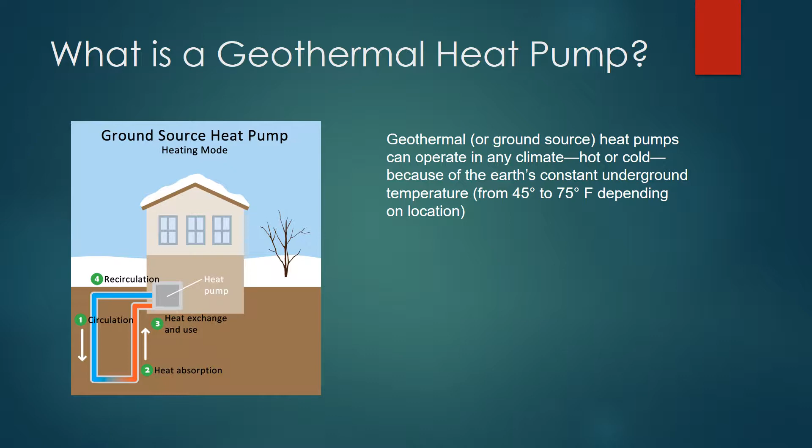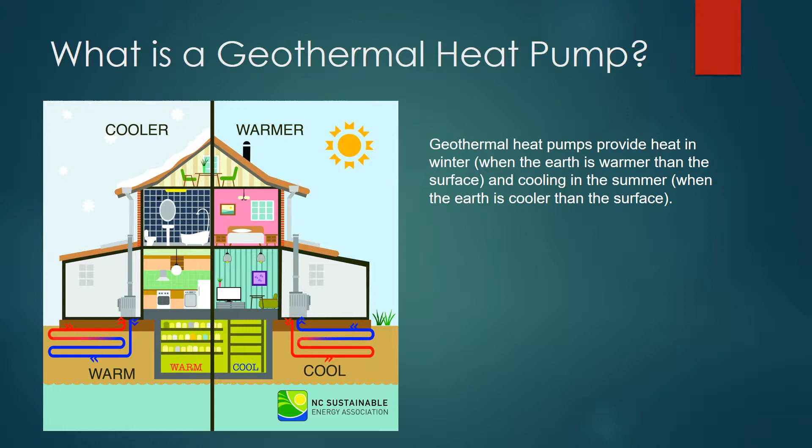Heat pumps exist all over the United States in all 50 states, and they are not limited by geography, weather, or climate. Geothermal heat pumps are generally deployed on a distributed basis. And by that I mean residential or commercial property owners install these heating systems in their own buildings.

Although there are certainly positive externalities and environmental effects, the benefits of lower energy bills, resiliency, and safety, as well as the costs of installation and maintenance, accrue largely to the individual building owners.

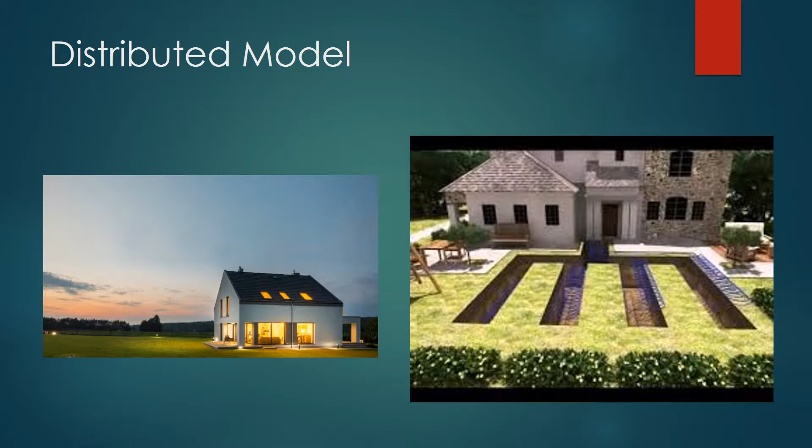Now, there have been some experiments in deploying these systems on a decentralized community-wide level. The best example of this is at Ball State University, which currently has the largest geothermal heat pump system in the United States. And when you deploy this technology at a larger scale, you can achieve advantages in aggregated loads, economies of scale, and increased efficiency of equipment.

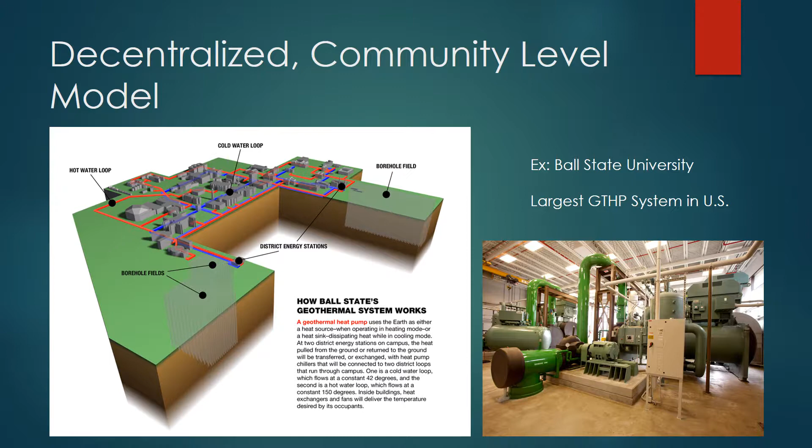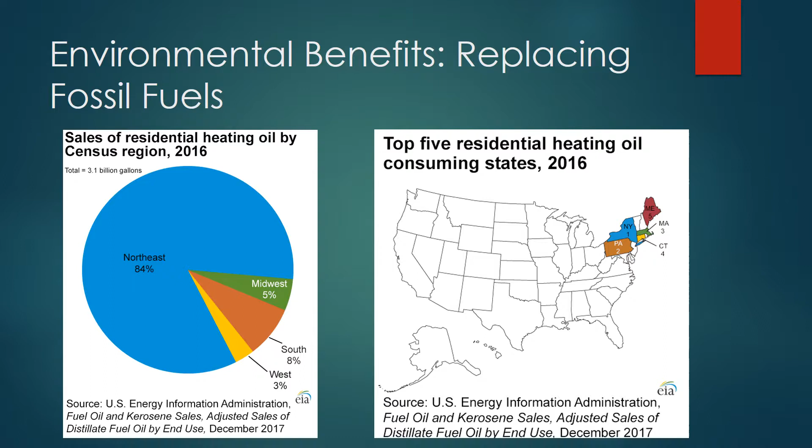So what are the environmental benefits? First and foremost, you're replacing fossil fuel heating sources. That includes natural gas and fuel oil. Fuel oil is dirtier and more expensive than natural gas, and as such is a prime target for geothermal heat pump installers and state governments looking to promote geothermal systems. But whether it's natural gas or fuel oil, both eliminate carbon monoxide and risk of gas leaks and particulate emissions and other pollutions associated with fossil fuel generation.

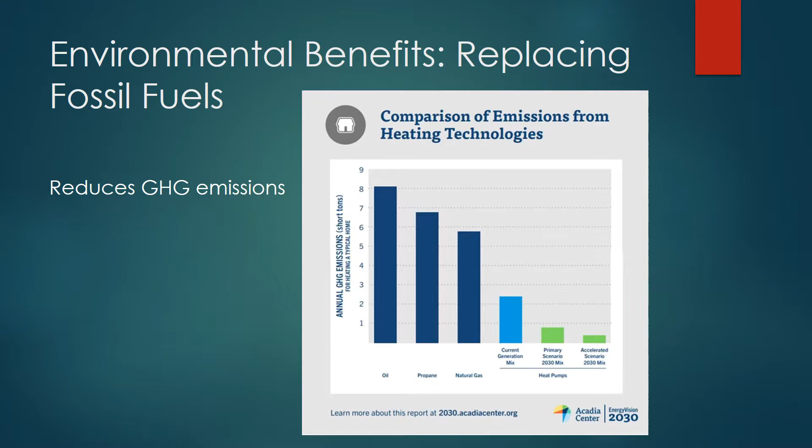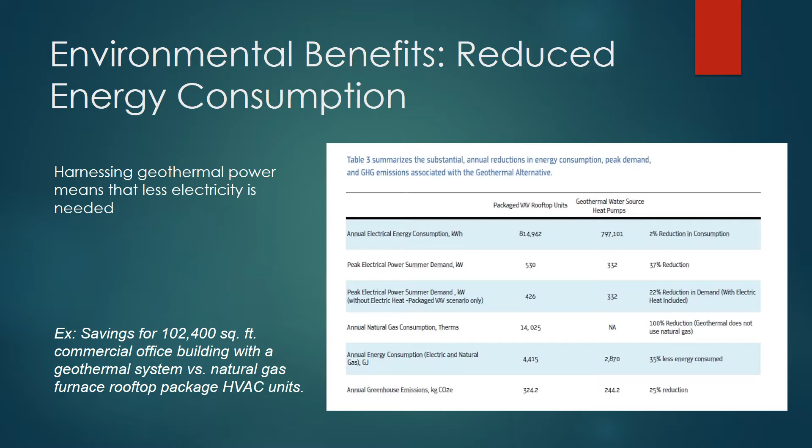What's more, in addition to replacing fossil fuels, you're also using less electricity, and this is because geothermal heat pumps are really efficient. Because they take advantage of the constant temperature in the ground, they need less electricity to achieve the same heating result. And this chart essentially crunches the numbers for a 100,000 square foot commercial office building that has a geothermal system versus one that's powered mainly by natural gas. And as you can see, the geothermal system results in less energy usage as well as fewer greenhouse gas emissions.

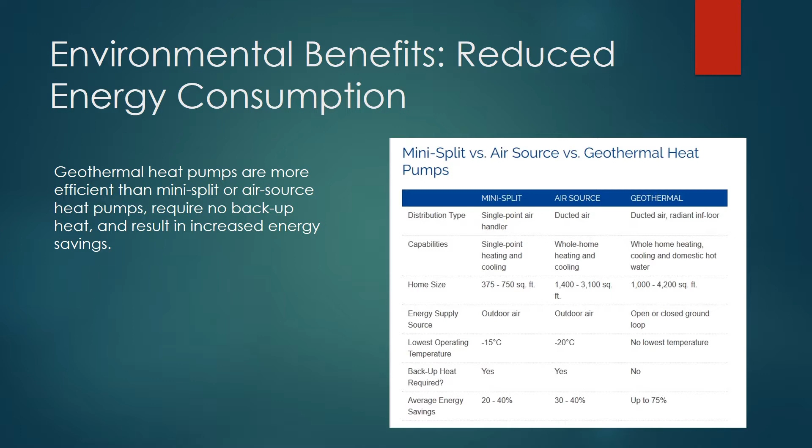Moreover, geothermal heat pumps are more efficient than air source heat pumps or other types of heat pumps that are electric. And as you can see from the last line of this chart, the average energy savings, the geothermal results in more energy savings than either a mini split or an air source heat pump.

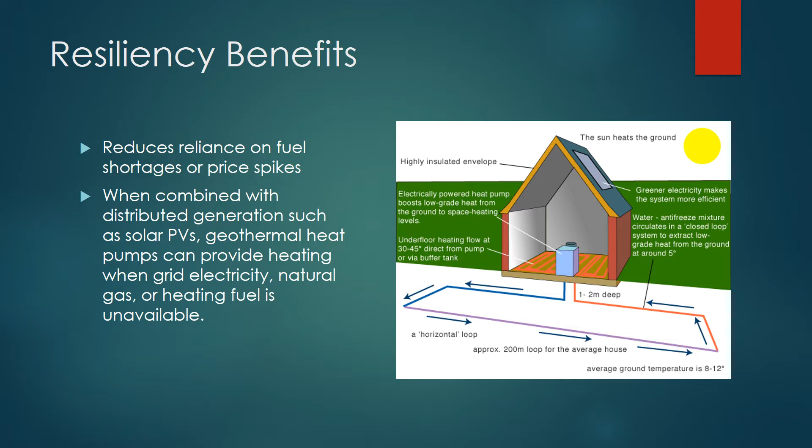Additionally, there are resiliency benefits. And so when you're not reliant on fossil fuels, you also are not subject to fuel shortages or price spikes. And this technology pairs well with distributed renewable energy, such as solar photovoltaic panels on your roof. And if you put combined solar PV and a geothermal heat pump system, you can have a really resilient home that's less dependent on grid-provided energy.

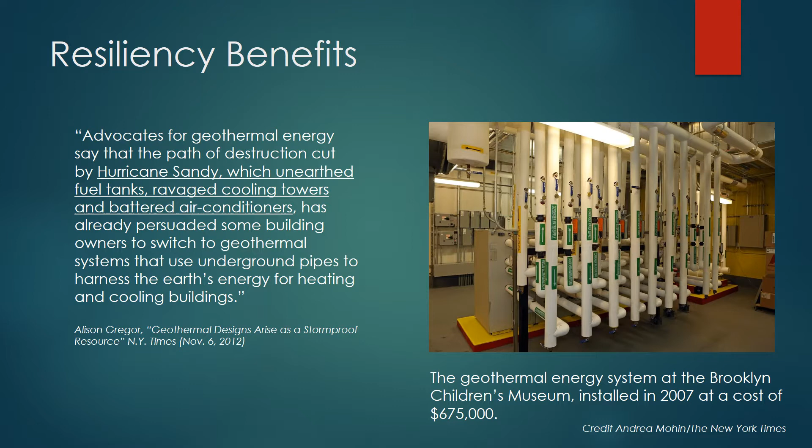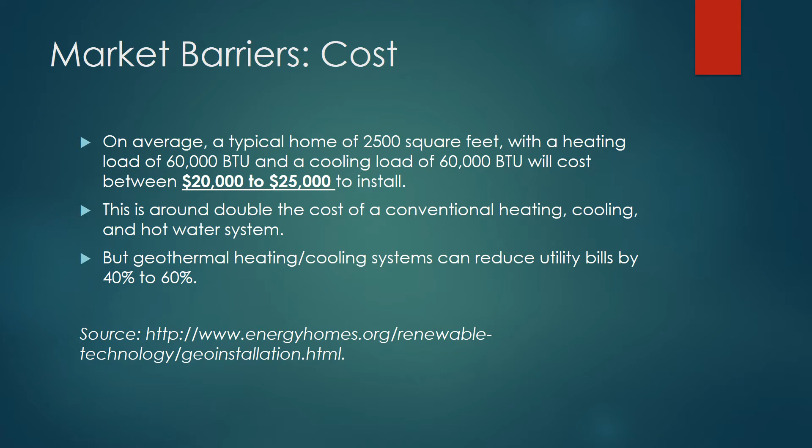So, if this technology is so great, why doesn't everyone have it? Well, the main reason is cost. Geothermal systems have a higher upfront cost than their competitors, although those costs have come down in recent years. Typically, the cost for a typical home is around $20,000 to $25,000 to install. It's around double the cost of a conventional heating and cooling system. But you also get reduced utility bills, and so over time the system will pay for itself.

Government subsidies have helped reduce the cost of installing a geothermal heat pump system. You get a 30% federal tax credit, which reduces over the next few years, and that stacks on top of any state subsidy already in place. So in New York, a geothermal system that costs $26,000 could be eligible for a $6,000 rebate from NYSERDA under their ground source heat pump rebate system.

And additionally, from that $20,000, 30% of that is subject to a federal tax credit. So the total cost would be around $14,000, and that's around a 47% reduction from the sticker price. And although it's still more expensive than some conventional heating systems, it's more competitive than it otherwise would be.

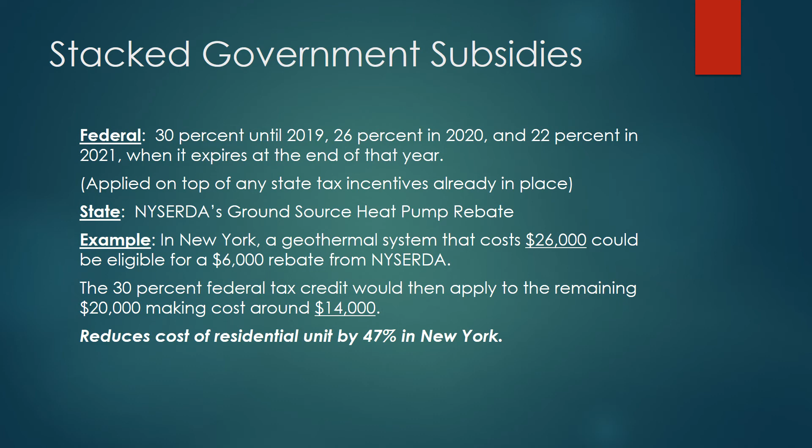So that's my introduction to this technology: the benefits, how it's deployed, the regulatory framework that governs it. A key factor going forward will be if a combination of cost reductions on the commercial side and subsidies on the government side can spur even greater adoption of this clean technology in the Northeast and throughout the nation.